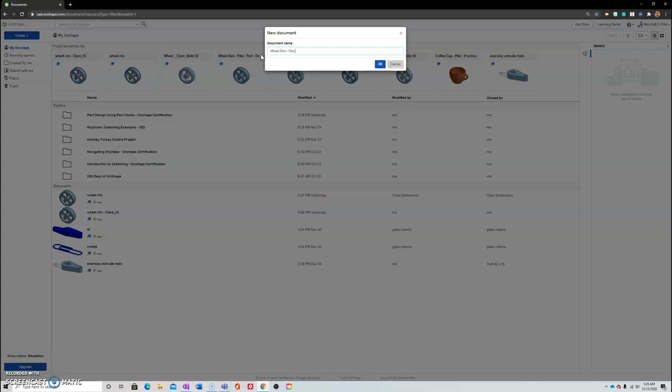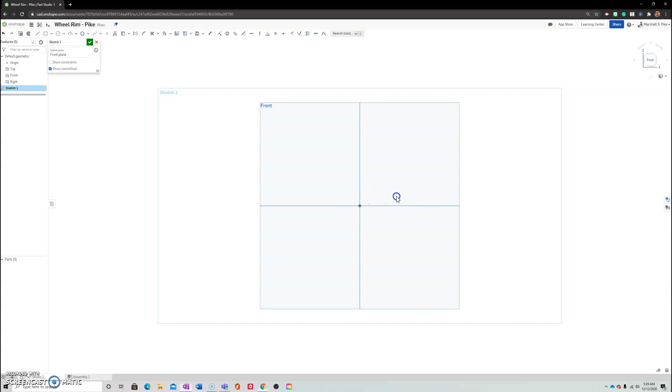Once we're inside, we'll create a sketch, Shift S on the front plane to use the normal work plane, and from here we can begin adding our geometric shapes. We're going to use a bunch of circles here. You could also use the offset command, but if you look at the slide, they give you the diameter of the actual circle. So I'm going to hit C on my keyboard and start it at origin, and do a series of circles.

The first one is 150. But as usual, I need to make sure that I change my workspace units from the default inch to millimeter. And I'm going to change this to gram - I believe it's gram for this one.

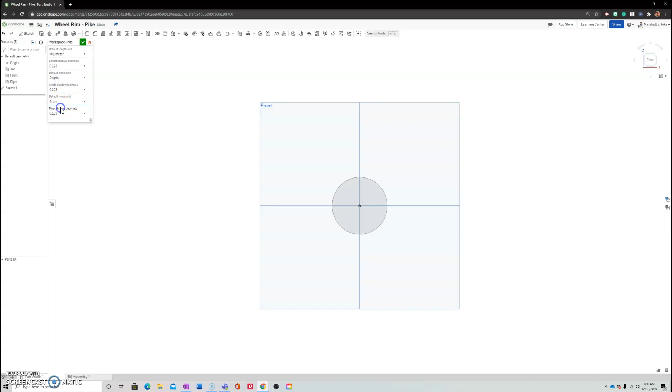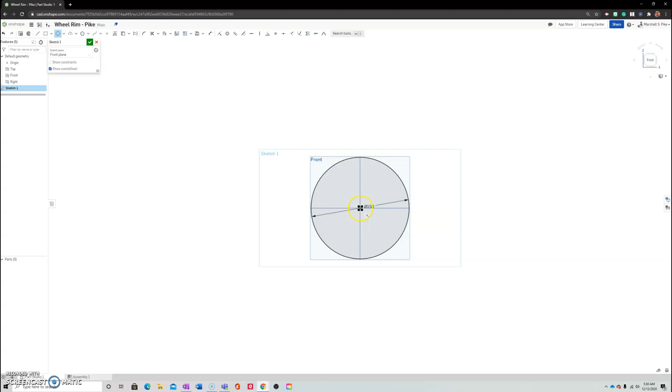So let's go back in here, delete this guy, and Shift S and start a new sketch again. C for circle, my first circle is 150. Now I might zoom out, and it's going to put this in here. For now, I'm going to leave it - I'll show you how to drag that out once we're done.

My second concentric circle is going to be 400, and from there it is, I believe, 475. And our final circle is 500 millimeters.

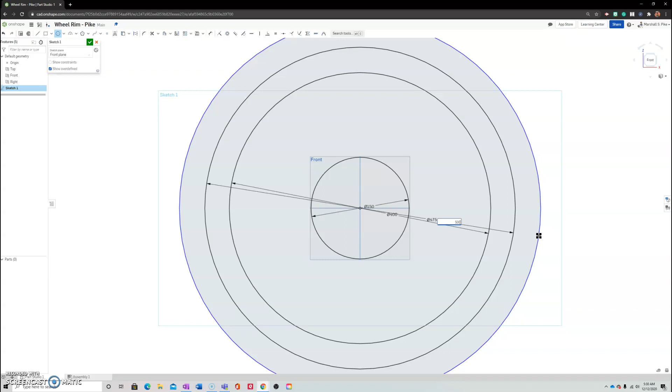Now I'm going to go ahead and escape this. So I have these diameters now with my dimension lines, and they really convolute my drawing. So once you're done, if you escape and then just click them and drag them, I would put them all in a similar work area. So I'm going to put them over here for now.

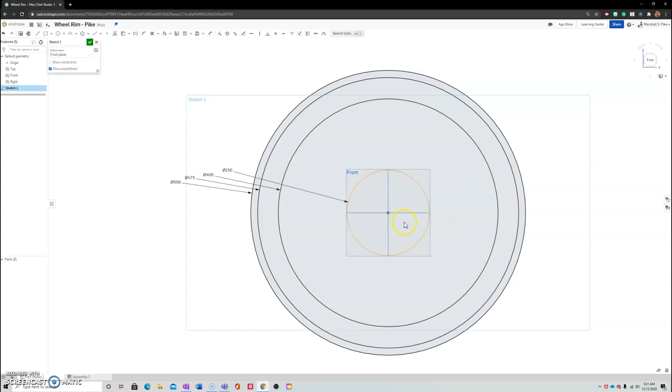The final thing I want to do in my initial sketch is add my angled lines that we're going to use for the spokes here in a little while. So I'm going to use L on my keyboard to activate the line command, and draw just my angled line and then go up to the second circle.

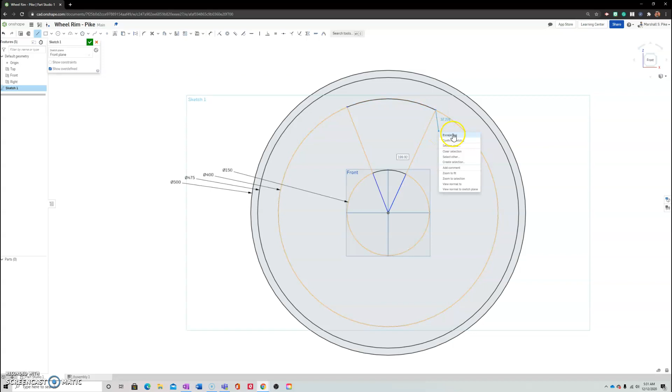If I draw these for now, we will dimension them in just a second. I will put them on here, and I need a third line that I will use as a reference point to put my holes on later. And this line needs to be a construction line.

So I'm going to hover over the line again, select it and hit Q on my keyboard, and that will change it to a construction line. And I need to make these 30 degrees. So D on the keyboard.

Select these two lines and drag straight up, and that should give you your angled dimension. And we're going to want those 30 degrees. What you're going to see here is these are still 30 degrees, but I want them to be symmetrically placed, or distanced, from this construction line.

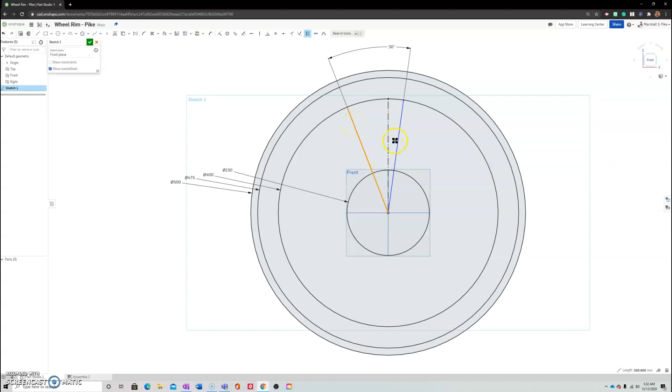So if I come up here to my quick access toolbar and find my symmetric constraint, and select the entities that I want to be symmetric - this line and this angled line - I want them symmetrically distanced from this center construction line. And now it'll snap it in place for us.

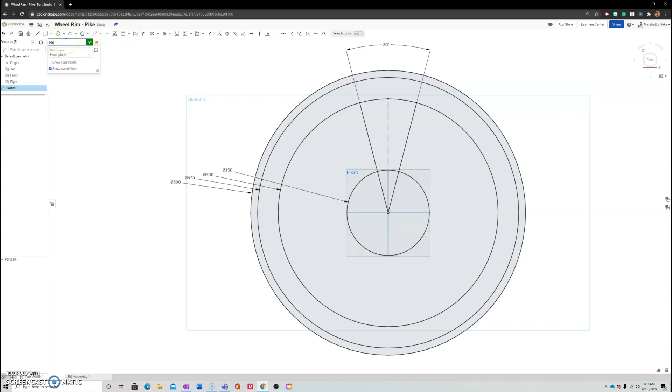And that is the first video on getting our two-dimensional lines in for this sketch. Check back in a second here, and actually before we go, let's go ahead and change this - we're going to need this later, so let's rename this and call it the main sketch. For now, once you do that, accept it, and then you'll be done for this video.